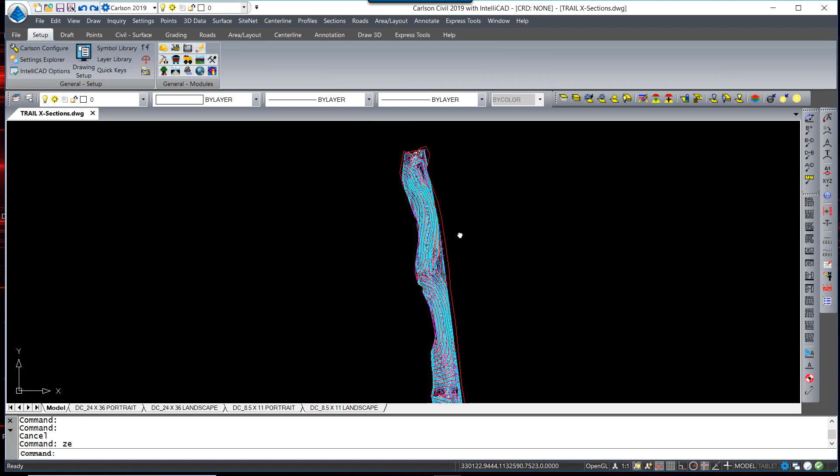First thing that I want to do is analyze this data and see what it is I have before I just blindly move into creating surfaces. But what I ultimately am going to do is create an existing surface followed by an as-built surface, cut cross sections, and calculate quantities. So let's take a look at this data.

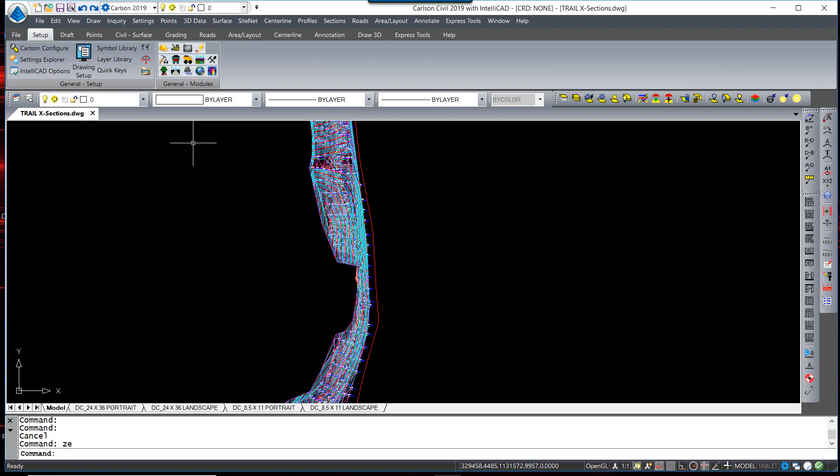One of the greatest tools that I like to use is the Drawing Inspector. I turn on Drawing Inspector, which is basically a toggle. It turns on and off. So immediately it doesn't appear that anything's happening, but it is. If you just right click, you'll see a menu of all the things you can display as you hover over an entity. So I'm going to turn on the layer name and the elevation, not the rest of this information.

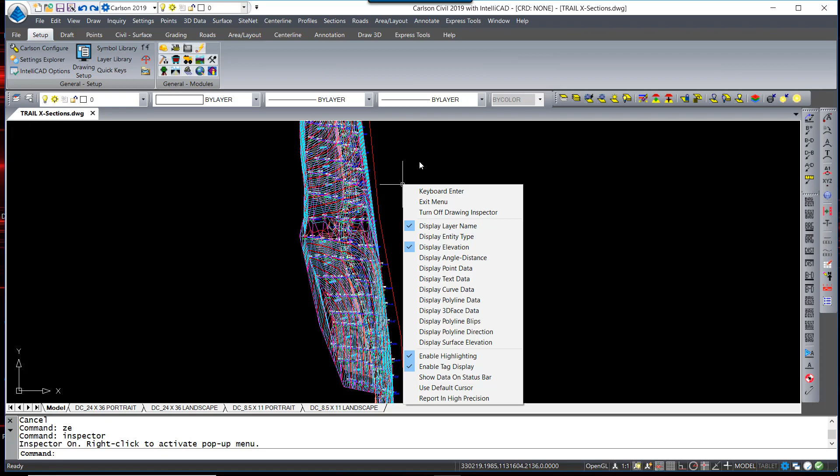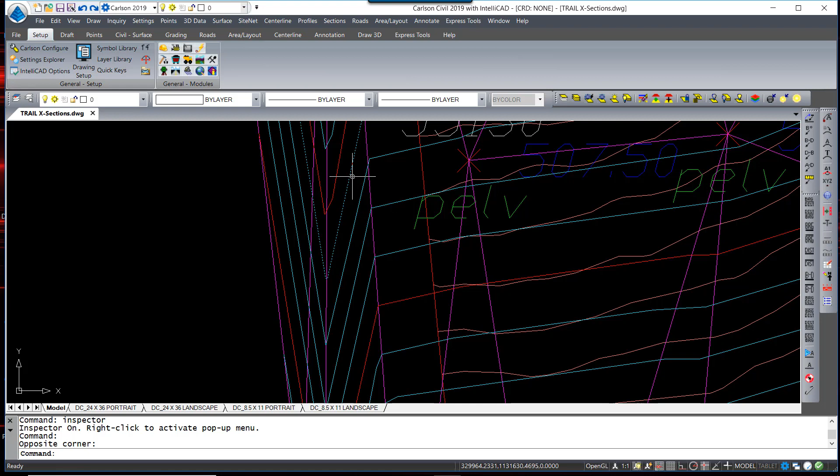So that's fine. And then I can hover over data such as these contour lines, and it displays the elevation of the contour line and the layer that it's on. I see we have E-contour, intermediate, and index. So those are the existing contour lines. Inside of that, I see a TIN line, and these triangulation lines are also elevated.

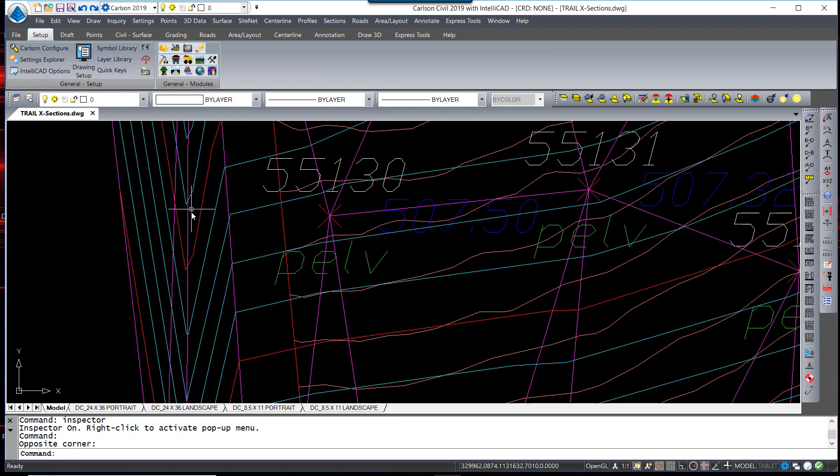Point data, which is not elevated, however, it does have a tagged elevation, so Carlson would use that as well. I have some other perimeter lines that are at 0 elevation. So knowing how Carlson works, that it's going to ignore things at a 0 elevation and take whatever is elevated and include that in the surface model, I know that I can use these entities as they are. I also see other contour lines in here on an as-built layer that are also elevated.

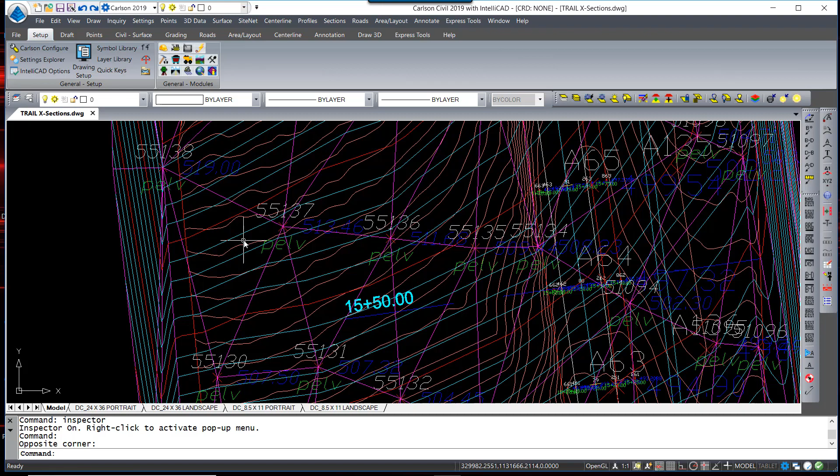These were actually created from a drone survey, whereas the existing contours were created from point data, an actual field survey. So I'm going to approach those two surfaces slightly different. Ultimately, it uses the same programming, but I'm going to evaluate them in a different manner. I see other point data in here. We have a center line of a road that is going to serve as the baseline for our cross sections.

I believe these are right and left edges of the roadway that are elevated. I can tell by looking at the elevations. The left side looks reasonable compared to the as-built contour. However, the right-hand side is considerably off, 400 or 500 feet, it looks to me like. So I may have an issue that has to be resolved.

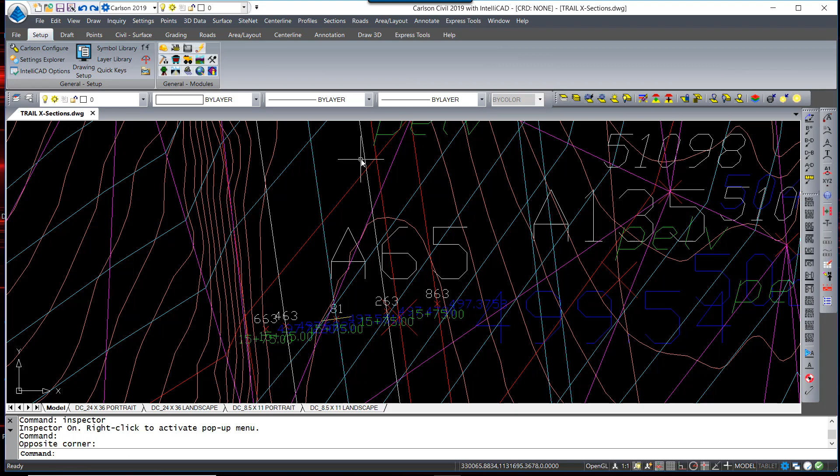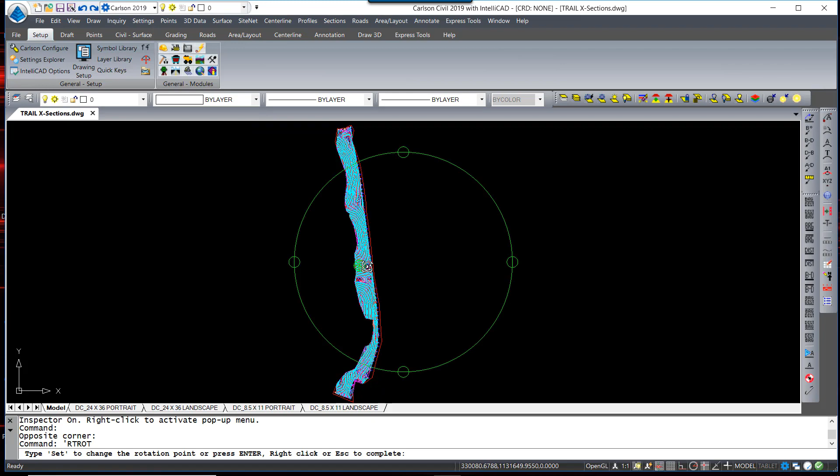Another way to take a good look at this data, and it's another thing I like to do in the very beginning, is I like to twist this up in 3D so I can actually see the data. One of the tools that I like for that is Orbit or Real-Time Rotate, which work very similar to each other, but you can just click and rotate in 3D the data. By doing that, I can immediately see some issues.

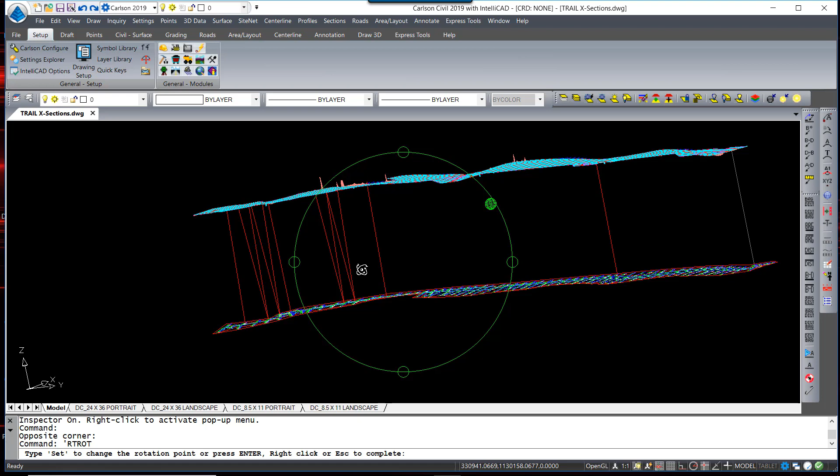That, in fact, is the right-hand side of the trail that I was talking about, and it is elevated inappropriately. They also have these spikes, these red lines coming up and down that are going in and out of the data. Those will cause problems with the surface model. And then I can see some spikes here. I hover over one of these, it is the as-built contour.

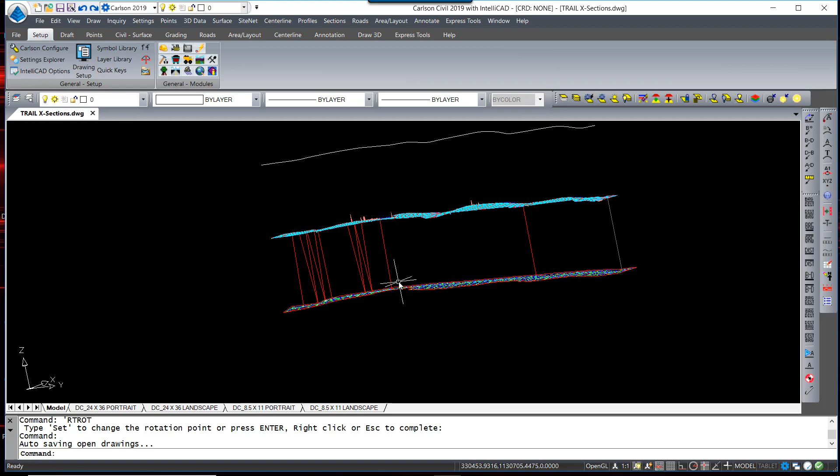So I had mentioned those are drone contours, so those are likely trees that were not stripped out of the drone data. So we have contours running up the height of a tree. So that will have to be dealt with. You can actually edit these in this view, which I'm going to do some of that, but I'm going to start by isolating some of these layers and see which ones have the issues, which ones I can use, and minimize the amount of editing that I have to do before I can get started.

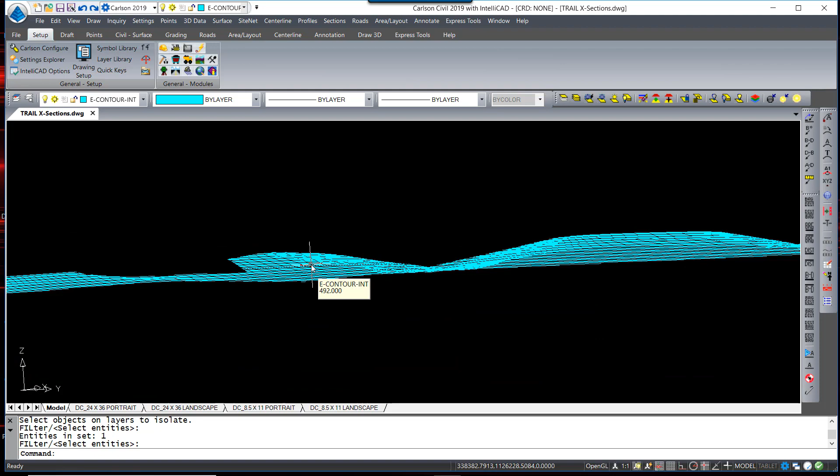So I'm going to use my isolate layer routine, and I'm going to pick one of these contour lines. So this is an existing contour. In my layer manager, what might be a little bit easier to do, I'm going to turn on the index. So I can see that my existing contours look very reasonable. I also want to take a look at those TIN lines. I believe those were on a layer called triangulation lines.

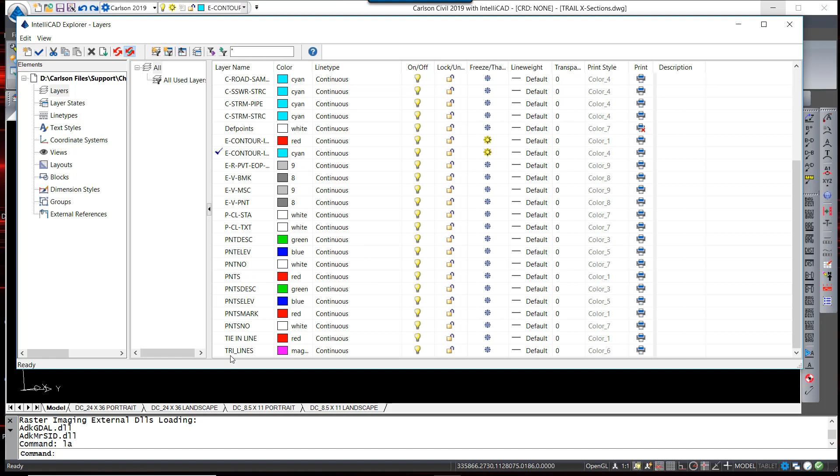And I'm going to turn those on. Those follow right along the contour lines. So those to me look like they are pretty reasonable. Turning all my layers back on.

These lines are called tie-in lines. I'm not sure what the purpose of those are for, but I know that they will introduce bad data into my surface model. So I can either just simply not use them, or I could correct them. I'm going to go ahead and clean some of that up.

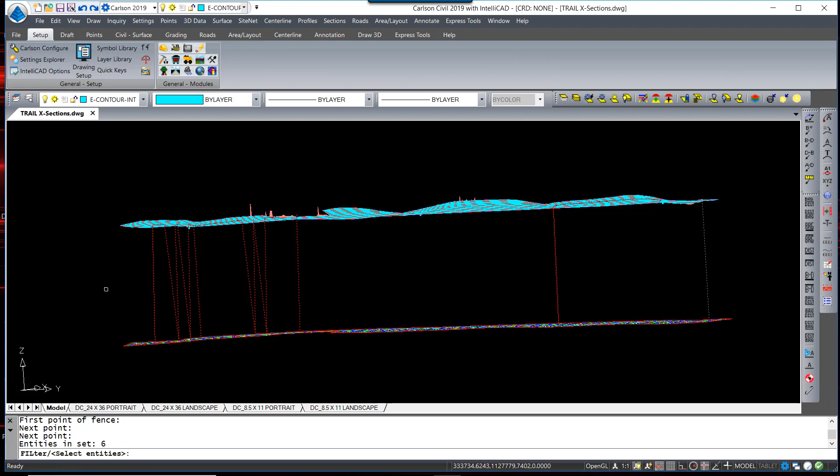I will use a command under Edit called 3D Entity to 2D. Command line prompts what elevation I want it to be. It's 0. And I'm just going to use a fence for selection and draw a line through here. It selects all those spikes, and when I hit Enter, they are all changed to 0. So that eliminates a lot of the data out of there.

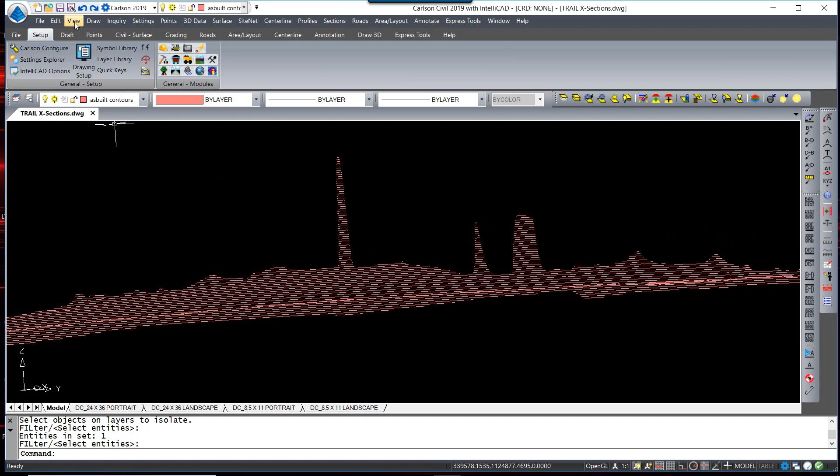I am now also going to try to clean up these contour lines on the as-built contour layer. So I'm going to isolate that layer and take a look at those spikes. So using my 3D orbit and rotating carefully, I can actually select some of this data and eliminate those contour lines, because I'm going to be building the surface model out of the contour lines themselves for the as-built contours. I have no other data in which to do that.

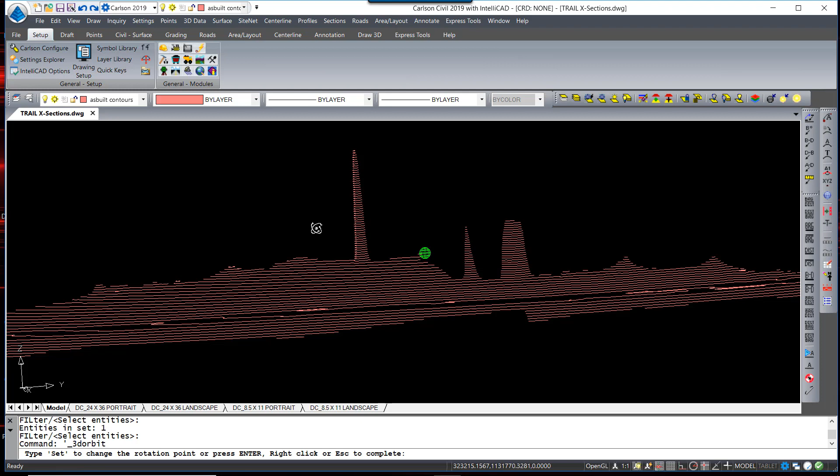So I'm going to at least try to eliminate the majority of these spikes to improve the quality of my surface model. So I'm simply just going to erase, and using a window polyline for selection, I can window these in. And I'm going to turn off my drawing inspector during this process. I'm going to spend a couple minutes here.

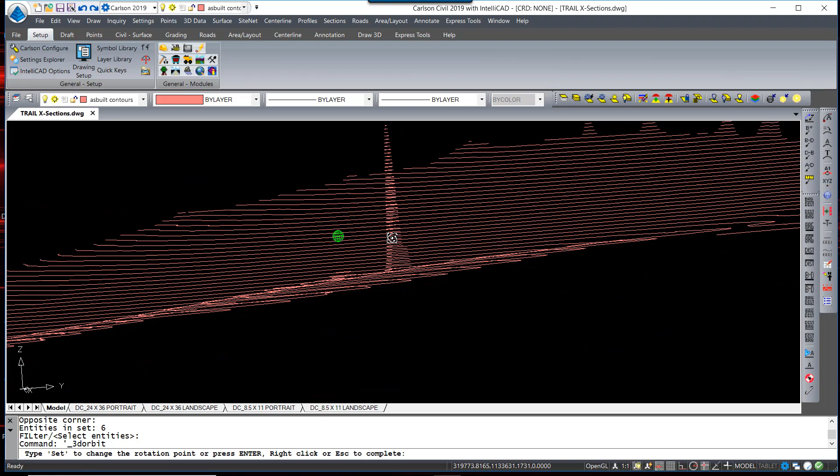In some cases like this, you have to be very careful about selecting. If I was to select too much here, I'd be erasing good contour lines. So I've got to be very careful about flipping up my perspective to make sure I'm not over-selecting or under-selecting data. Once I've completed editing these contours and eliminating data as best as I can, thaw all my layers again.

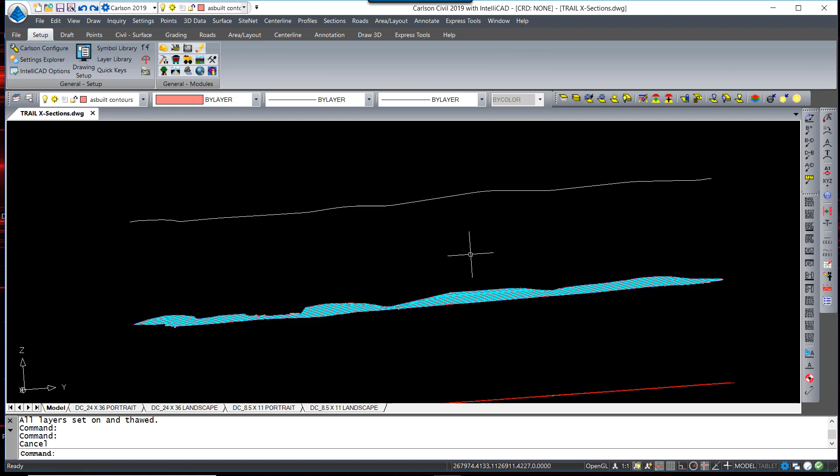The other thing I can do is either change or move this line. I'm not real sure of the datum change that created this particular line to be out of line with the rest of it, so it's off maybe 500 feet. So I'm just going to simply not use that line. So when I completed my editing process, I am going to go back to under the 3D view, hit Plan View, and it returns you back to this perspective.

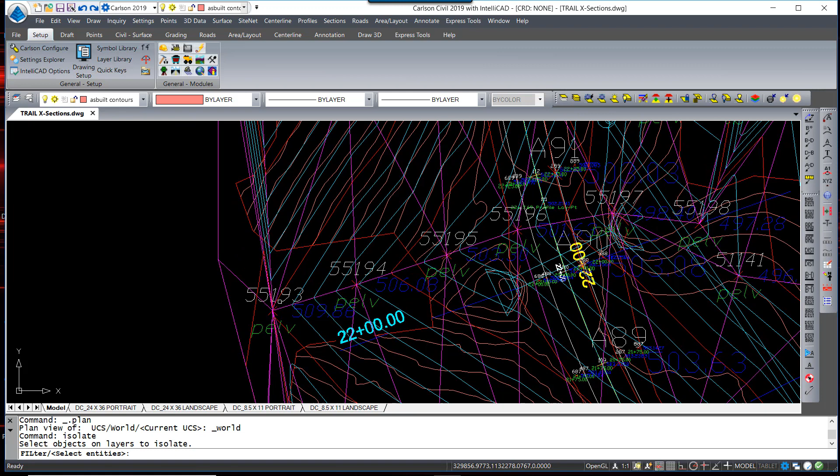So I'm going to start with the existing surface model to build that. I've already determined actually that the TIN lines and the contour lines are pretty much coincidental with each other, so those look to be pretty good data. So I'm going to simply build the surface model out of the TIN lines. So I isolate that layer. And there are my TIN lines.

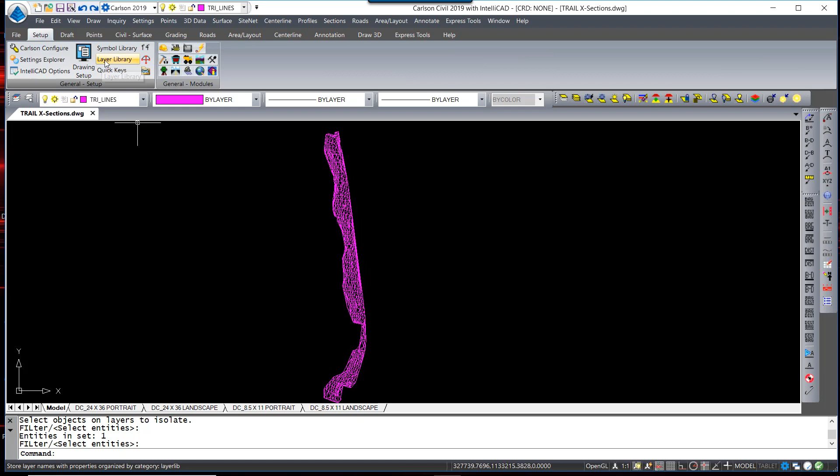So now I go into the surface model, and I'm just going to triangulate and contour. I have Write TIN File on. I'm going to hit Select, and it will create a new one. These are the existing, so I'm just going to call it Existing. Under the Contour tab, I don't really want it to draw contours, so I'm going to turn that off. I certainly don't want contours labeled. I'm just going to check my selection set.

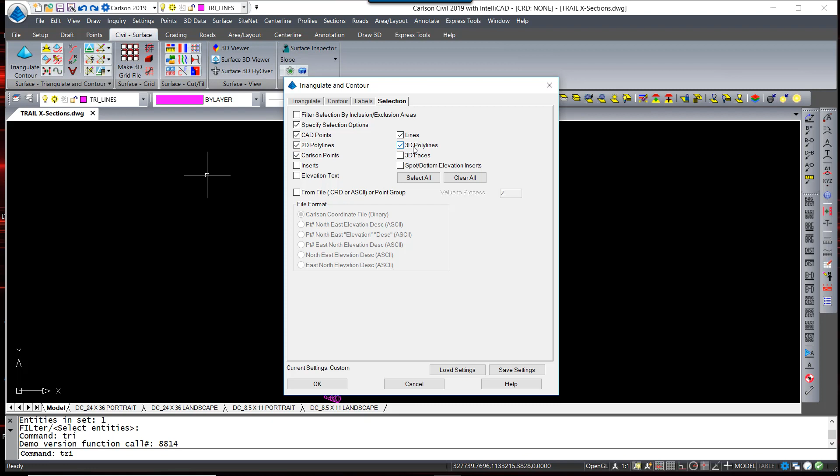They're all grayed out right now, and if I click this box for selecting the options, I can determine and verify that I have 2D polylines, which are contour lines, and 3D polylines, which are those TIN lines. So all my selections are in there. Ignore zero elevations, as you can see, is the default. Inclusion-exclusion areas is there so you can create a boundary if you want as an inclusion area, and then you could have separate polylines as exclusion areas. I am not really going to worry about that.

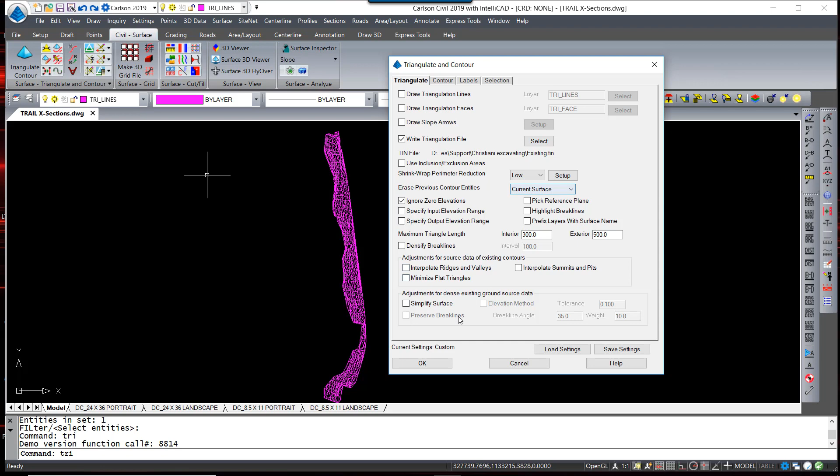I'm going to instead allow it to shrink wrap the perimeter, which essentially makes a boundary line invisible to you. By selecting it, it creates a shrink wrap entity, which is another Carlson command that draws a polyline around the outside of the entities. It's going to use that as the boundary with 3 options, low, medium, or high, which dictate how tight it follows that boundary. So I'm going to leave that on low, and all I have to do is hit OK now, and I will window in those TIN lines. So it quickly made the existing surface.

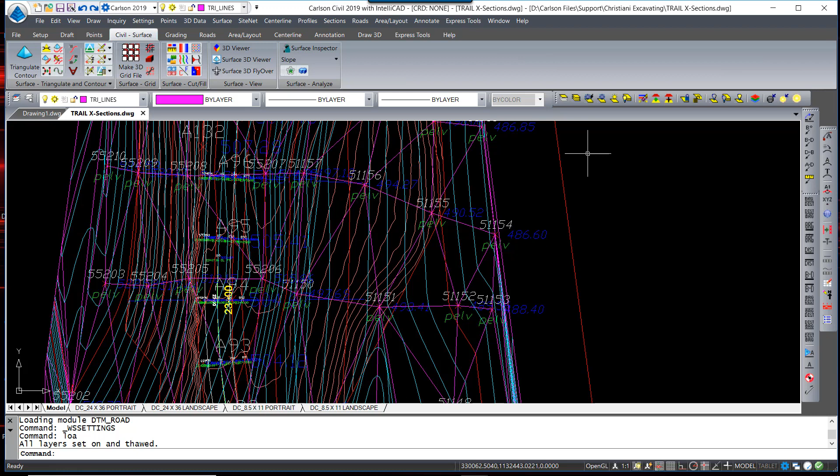Thaw these layers again. Now for the as-built surface model, the only data I really have is these contours developed by the drone survey, which I've done my best to edit. So I'm going to isolate that layer.

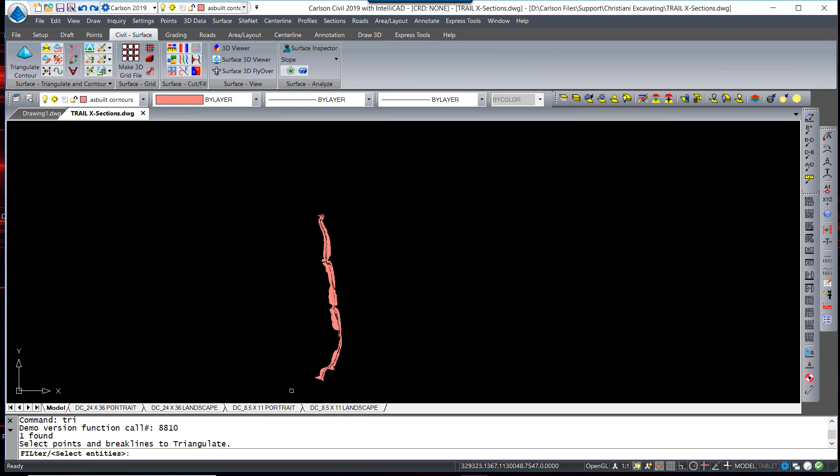Essentially do the same thing. Just going to create a surface model. Triangulate and contour. Create another TIN. This one I'm going to call as built. All the rest of the settings are the same. Just window this in and enter. In this case, I found some errors in here.

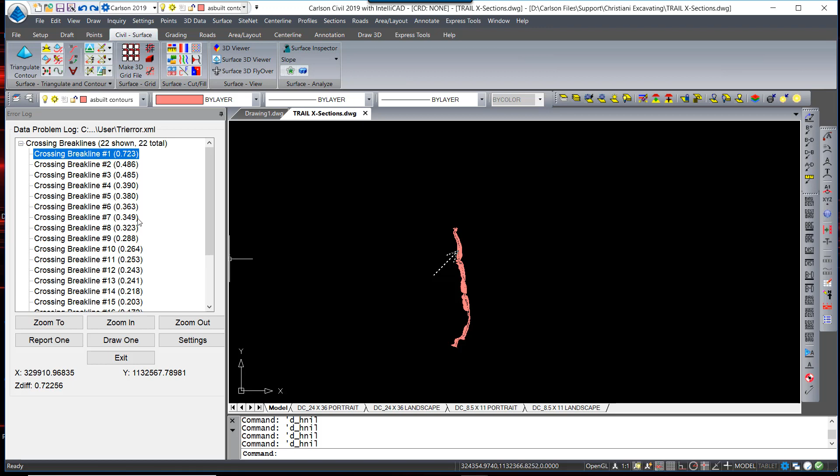Crossing break lines. This shows the elevation error of each crossing break line. Those are large enough there that I am going to concern myself with them. Some of these smaller ones aren't a big deal, but that's 3/4 of a foot. So I'm going to highlight one and just hit zoom in a few times until I find it. And right there I see that there is a line that is crossing over the contours.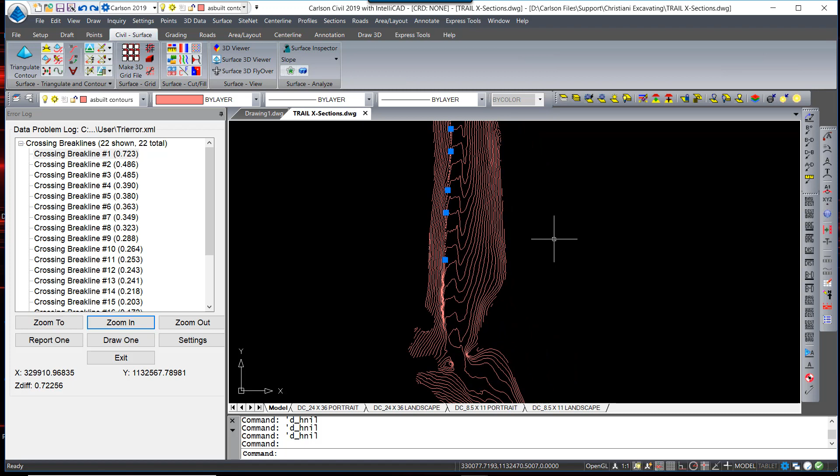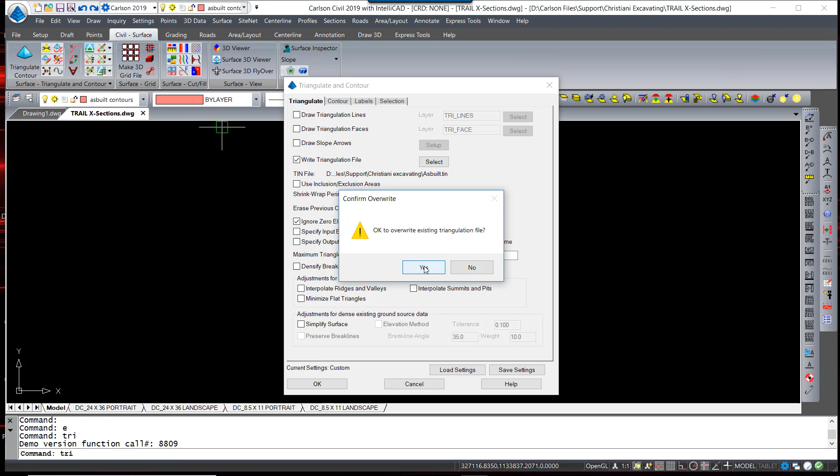So I'm just going to erase that and quickly look and see if there's any more of those. They highlight. I see one on the other side here, so I'm going to zoom into that. Same situation. There are some lines there, so I'm going to erase that and exit. And we'll just try that again. Say yes to overwrite that, and that time no error. Turn all my layers back on.

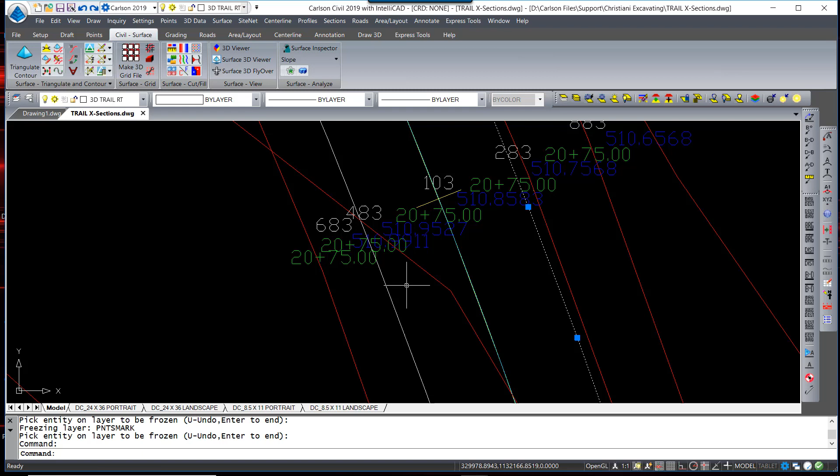Now I want to establish this alignment. But to make my life easier, I'm going to freeze some of these layers now that I don't need. I don't really need to look at the contours or the point data. I find other point data in here that appears to be a calculated layout. So I'm going to get rid of that, remembering that this layer, or this side of the roadway, had errors. I'm going to freeze that as well. So I've got my layers set up.

I'm going to define the center line, the baseline of this project. I have a polyline that's drawn in here. It looks like it's continuous from beginning to end. I'm going to check, though, the stationing on it is labeled here at every 50 feet plus some odd intervals. So I just want to check and make sure that this is the beginning station of 0+00.

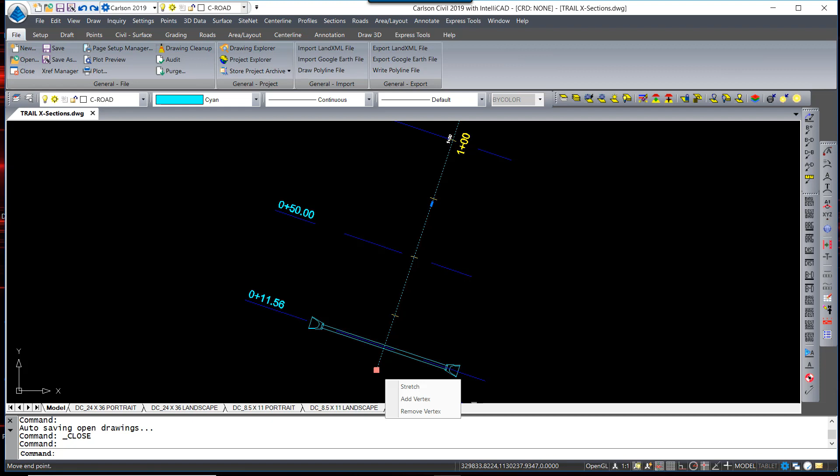So I'm just going to inverse from the intersection at 1+00 to the beginning. And I see it's not exactly 100 feet, 98.366. So that means the beginning of this is actually 1.633, and not 0. So I need to keep that in mind when I create my center line, which is the next step here. So I'm going to go under Create Polyline to Centerline File.

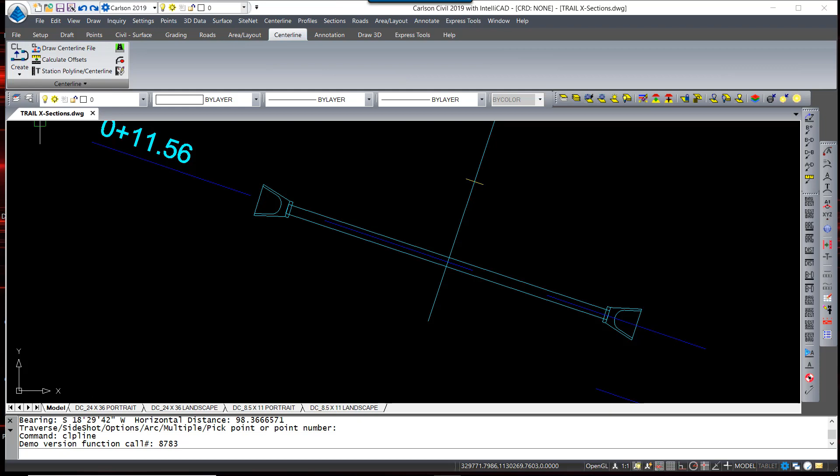So it's going to take that polyline that's already drawn and write it out to a .cl file. I will name that CL Road. Select that polyline. You see briefly that there's arrows showing the direction of the polyline. The stations are ascending based upon the way it was drawn. If it was incorrect, you have an option to reverse it at this point.

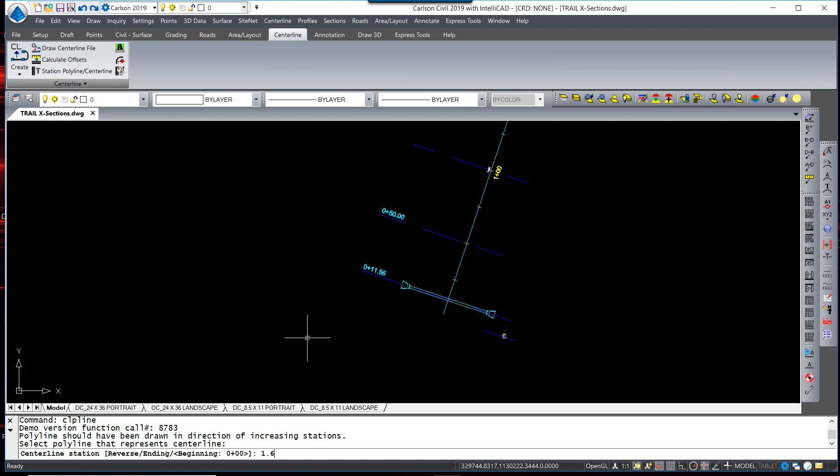It defaults to the beginning of 0+00, which we realize is not quite correct. So we're going to put in station 1.633, and that defines our station. Verify that by using this command, calculate offsets. Make sure that I'm defining the centerline by the centerline file. I hit OK. Grab that centerline file. You see a little display of that.

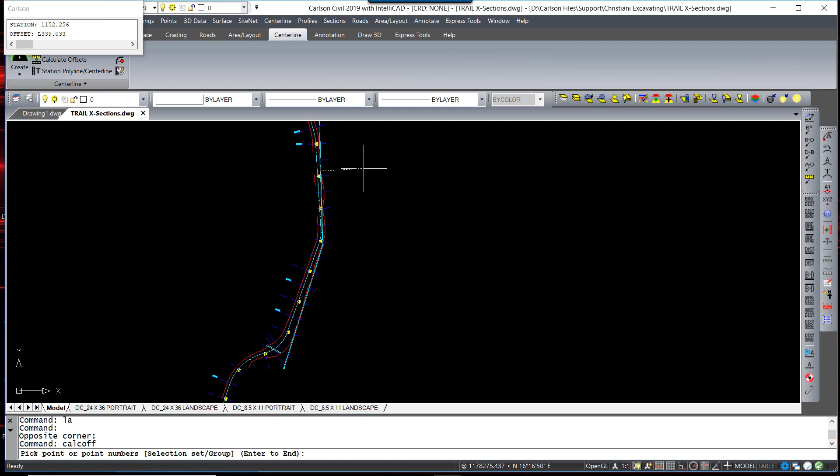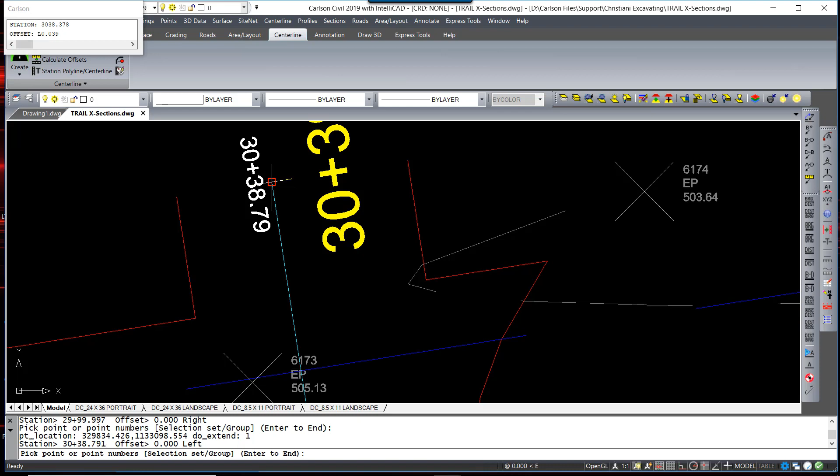And I hit open, and as I move my cursor around, you can see in the dialog box above that the station is changing as I move through. So I'm just going to go up here to the end and pick an even station here at 30+00, and we're within 0.003 of a foot, so that's going to be good enough. I'll double check the end station, 30+38.79, so that's good. Let's get out of that command.

But when you issue this command, it does create a report of any points that you ID'd, and you can print those out if you wanted to. Now what I'm going to do is define a cross-section layout. I'm going to go into my sections menu. And this is somewhat of a two-step process. First thing we're going to do is input edit a section alignment.

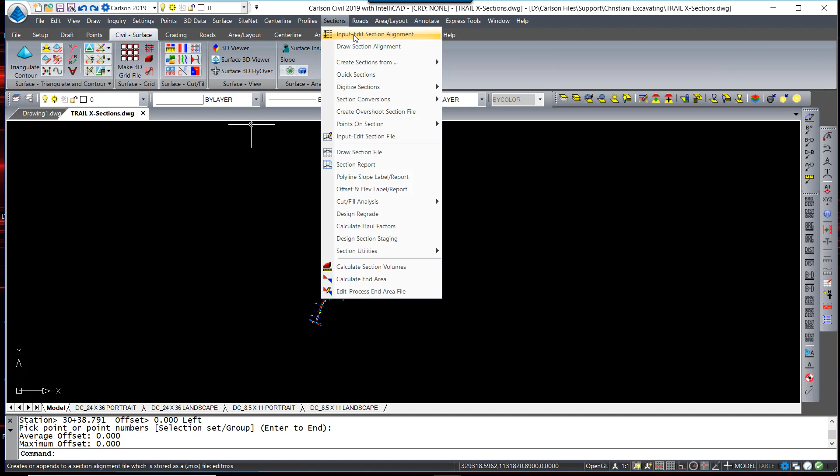What that does is define the alignment of the sections that we're going to take. The section alignment is basically giving it the horizontal alignment, the width of the cross-section sampling, and the frequency of the samples.

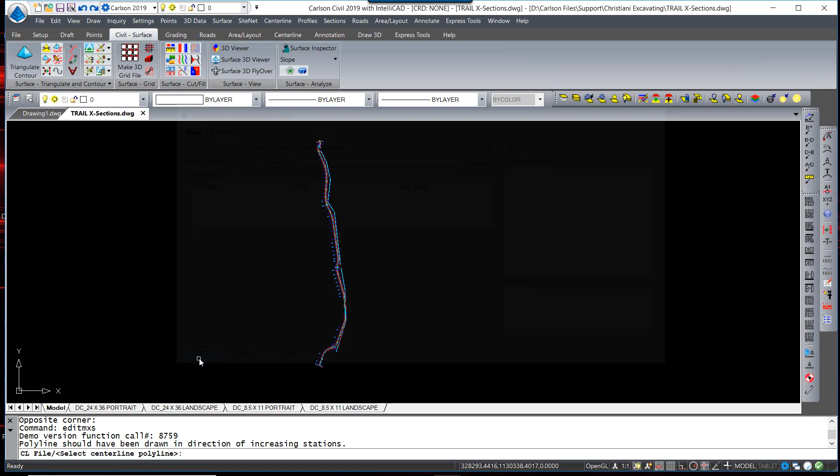I'm going to go into Sections and Input Section Alignment, and this creates an MXS file which contains the alignment parameters. It's asking me to identify the center line. We already have the center line file created, so I'm going to hit F for File and select the center line file again. Then we enter in the station interval.

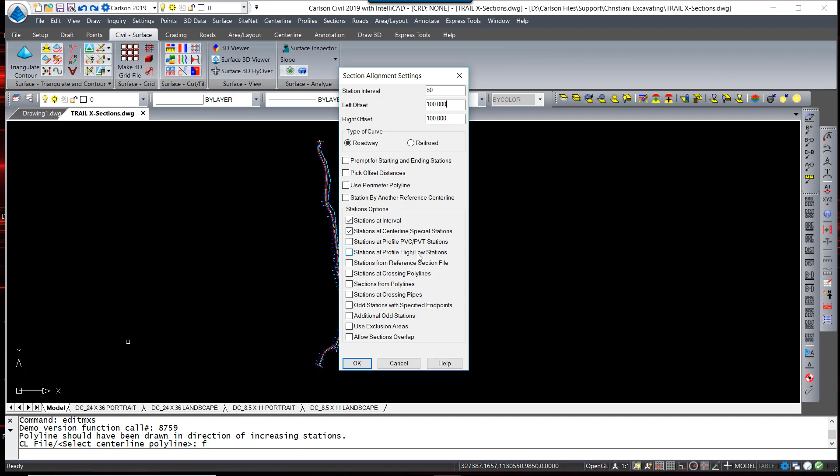We want them every 50 feet, and the left and right offsets. So I'm going to leave them at 100, even though it's more than what I need. If it exceeds the surface model's parameters, then it will just stop. Then you have other options in here about prompting and adding additional stations, special stations like on profiles, PVC, PVT, etc. I'm not going to concern myself with those, so I'm just going to hit OK, and that sets up

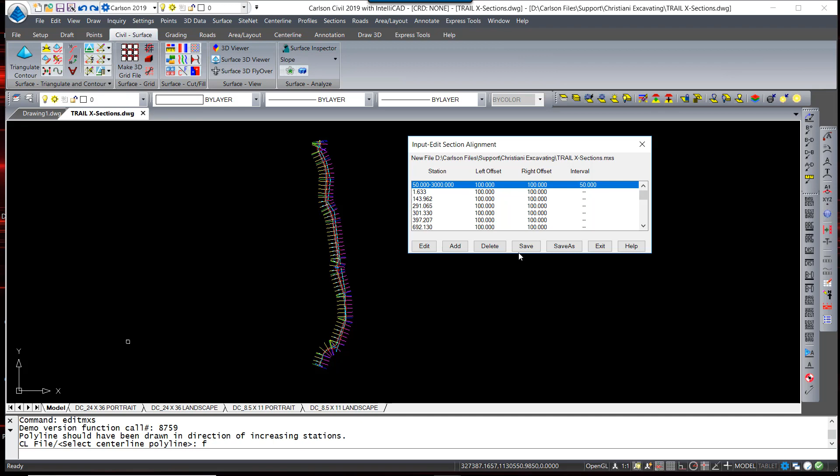the alignment. You can see temporarily on the screen colored lines drawn along that sample line. So those are where the cross sections will be sampled. You also have a dialog box that shows up that allows you to edit this MXS file, this alignment file, as you see fit. So we hit save and exit, and that portion is done.

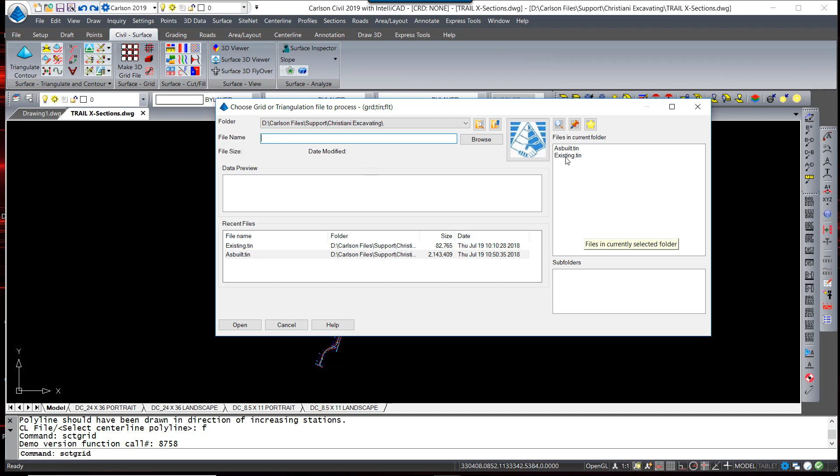The next step is to actually sample from that MXS file. So we're going to create the cross sections from a grid or TIN surface. So this is first selecting the TIN surface that we're going to sample from, and we're going to start with the existing TIN. Link sections to the triangulation.

That linking means that if we were to update the TIN file for whatever reason, the cross sections would update with it as well. I'm going to set that to prompt. I don't anticipate that we'll be doing that, but just in case. So I'll hit OK. And then it's asking me to select the MXS file to process, which is the one we had just created. The next prompt is asking us to create a section file. I'm going to name it Centerline Road.

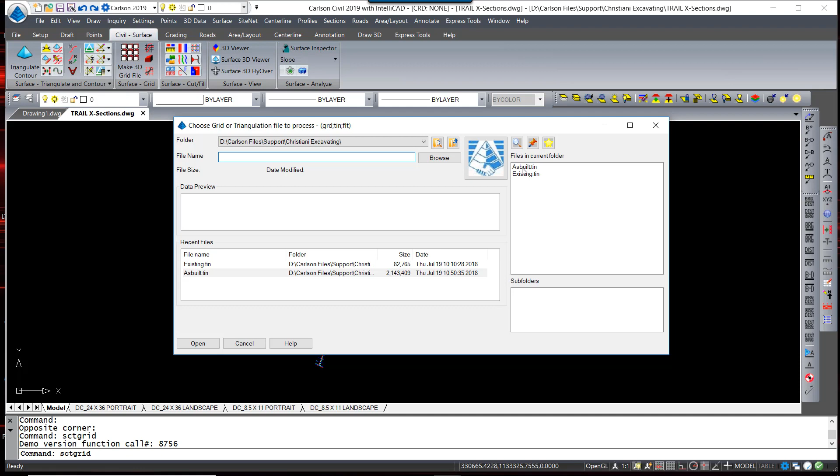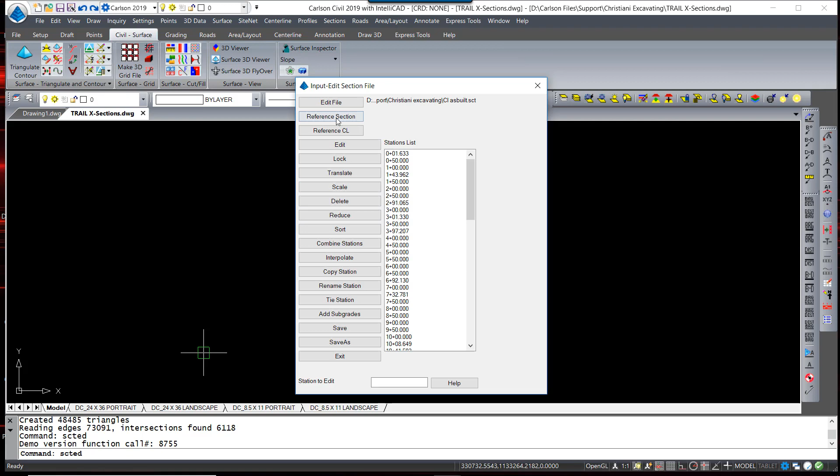I'm going to repeat that process, creating sections from a TIN file. This time I'm going to pick the as-built TIN, but using the same MXS file and writing out CL as-built. Now, if we want to look at those files, we can now go into Input Edit Section File. So I'm going to start by looking at the as-built, open that up, and then you see an option for a reference section. I'm going to put in the original CL Road file.

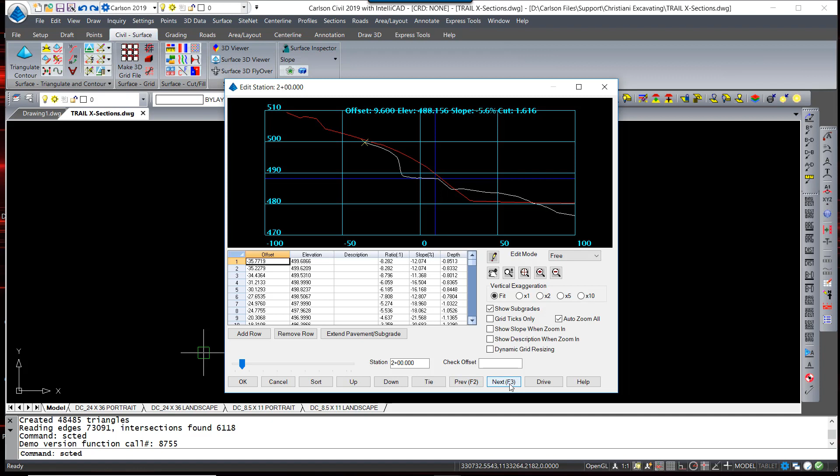I can look on these now and I can compare the cross sections, and by using the next button I can just go through one at a time and compare the cross sections between the as-built and the original files. Now you can, if you want to, actually edit these. You can see that there's points not tying in exactly correct. They're at the exact same position, keeping in mind that we have a vertical exaggeration of fit.

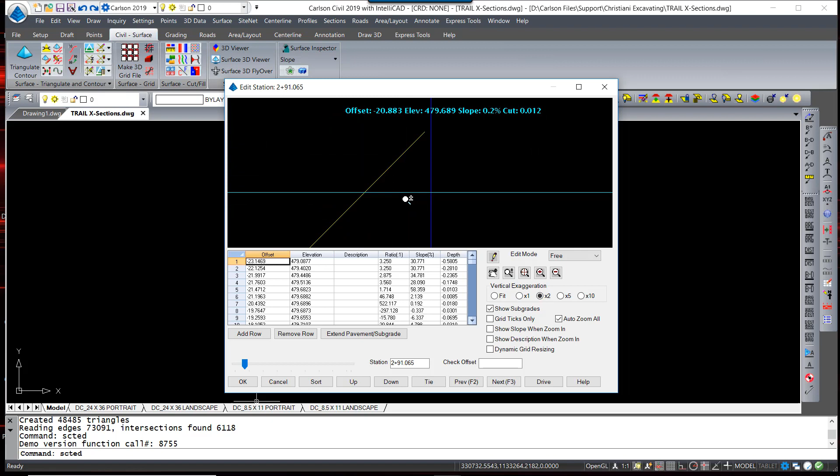If we lowered that to say just a ×2 or something, we'll see those a little tighter than what it appeared before. I like them on fit just so I can see the whole thing. So I'm going to close out that and exit that for now. Now that we've created and reviewed the cross sections, we're ready to print them.

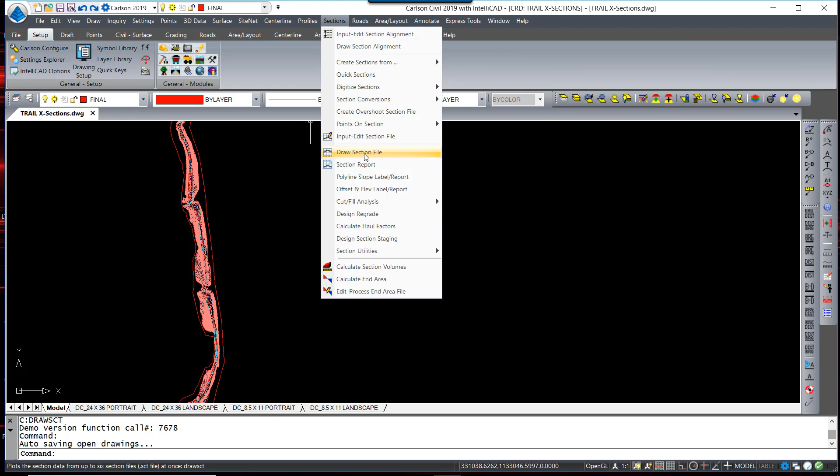So we'll go back into Sections and execute Draw Section File. This dialog box pops up and we can add cross sections. So I'm going to add the existing cross section first and add the as-built cross sections second. The order of these will become apparent in the next step. And then I hit OK.

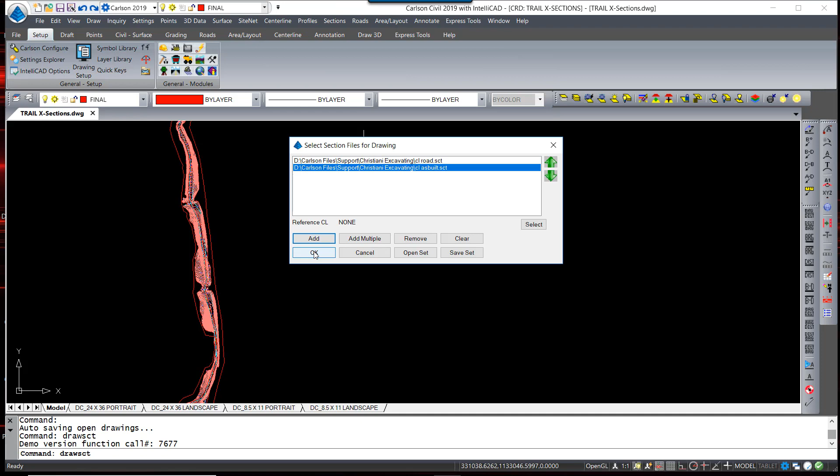So here's the dialog box for setting up drawing the cross sections. So the first thing I'm going to do is pay attention to the horizontal and vertical scale. So these are set to 40 and 4, which I'm going to leave. It's a 10 times vertical exaggeration.

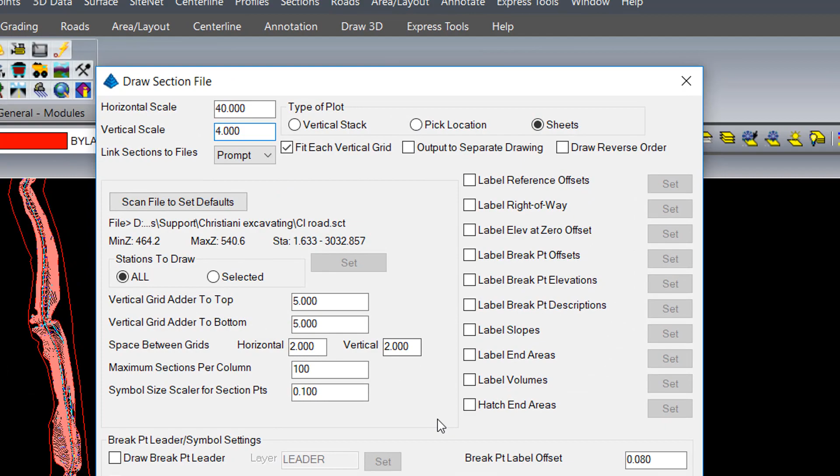I am going to pick sheet plot, which means it's going to attempt to place cross sections based upon the sheet size. I'm still going to do that right here in model space in my drawing, as opposed to a vertical stack where they would all be on top of each other or manually picking each location.

Now, to set the defaults, to find the minimum and maximum heights and widths of the cross sections, we execute the Scan File to Set Defaults button. It asks if we want to set sheet numbers of rows and columns, and I'm going to say yes. So it scans the file and puts in a minimum and maximum elevation, the station range, and sets up the defaults for the sheets as we're going to plot them.

I'm going to draw all the stations. If you only wanted to draw some, you would simply put that on selected. I'm going to leave these defaults alone - these have to do with how each cross-section is going to lay out on the sheet.

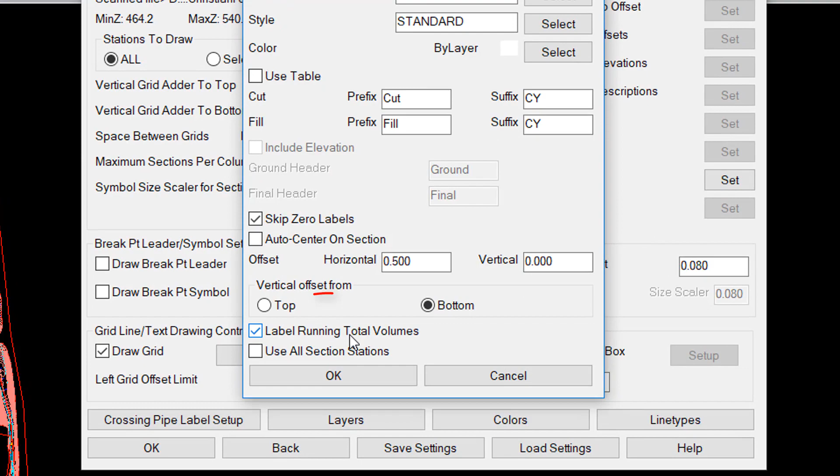Now there are several options of what to label as you're drawing the cross-sections. The ones of note are label volumes and label end areas. If I turn those on, it will do an average end area calculation from the cross-sections, which, if you have good cross-section data and are required to produce a report like that, would work out well. It will place an accumulative volume on each cross-section, and you have an option to label running total volumes as you go.

It's a more accurate option to calculate volumes using the two-surface method, which essentially compares one TIN surface to the other. We already have those TIN surfaces created, so I'm going to calculate volumes using that method instead.

So the next thing I'm going to do is take a look at the grid setup. This is to draw a grid for each cross section. You can set your layers and text sizes, but the main thing I want to check is my horizontal and vertical grid spacing. I have those set to put a grid every 50 feet horizontally and every 5 feet vertically. That should coincide with the vertical exaggeration that I'm using.

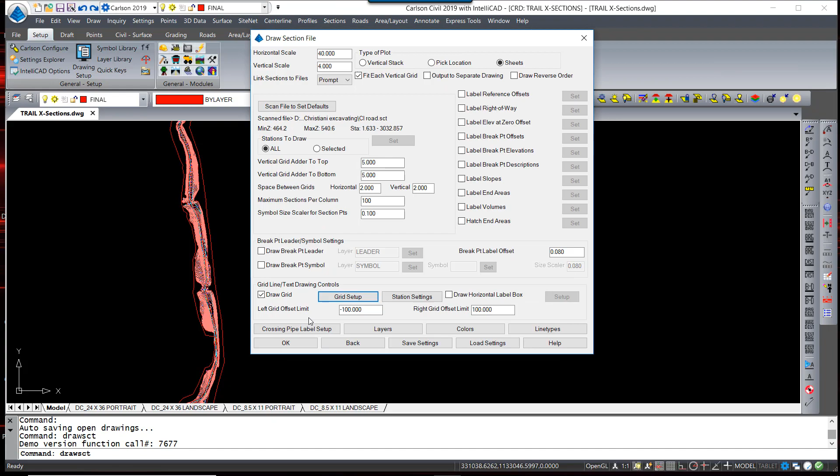The next thing I'm going to take a look at is the layers. The order of those section files that I brought in coincide here, so the layer that it's going to draw the existing on is called existing, and the as-built is going to be on one called final. We didn't define any subgrades, so that will not be plotted. So when I have all my settings ready to go, I hit OK.

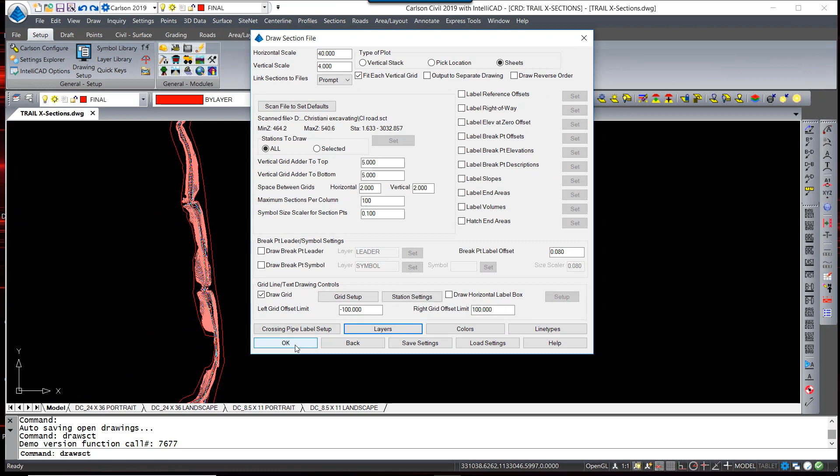So the sheet drafting parameter dialog box pops up. This would not happen if I were using another method, like vertical or picked. I'm going to go ahead and plot these in model space, so they're just going to be off to the side instead of, say, creating layout tabs.

This block name is a standard sheet that's set up. The expectation is that you will modify that sheet with your own title block and whatever other information you want on a standard cross-sections sheet, but this is just the default sheet block. This is the size of the paper, including the borders, sheet layer.

Then we have an option for rows and columns of the cross-sections. These values are in here from this cross-section scan that we had performed earlier. So this was going to plot them out with just one row and five columns. I'm going to force that to tighten up a little bit by putting two rows per sheet. Once these values are all set, we just hit OK.

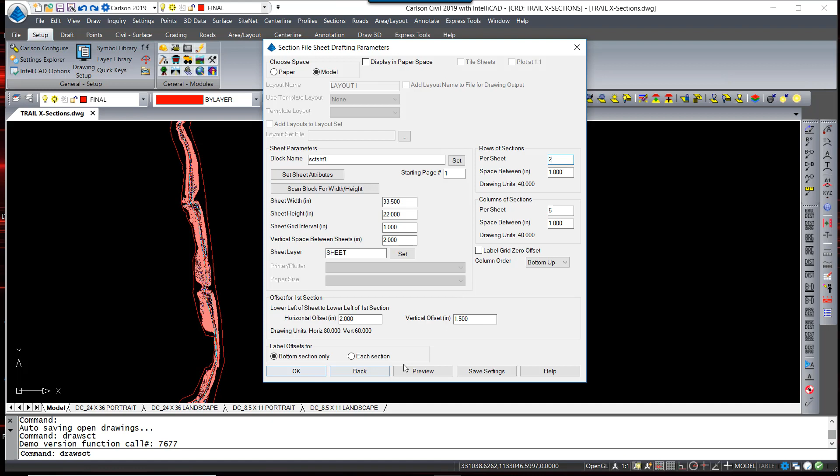Then it asks where you would like to begin plotting these, and I'm just going to pick a spot on the screen off to the side. So the program draws all the sheets with the cross sections at the scales provided.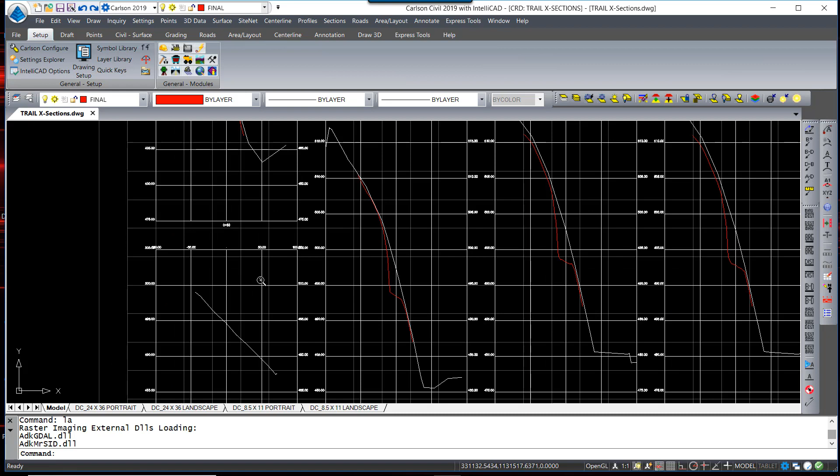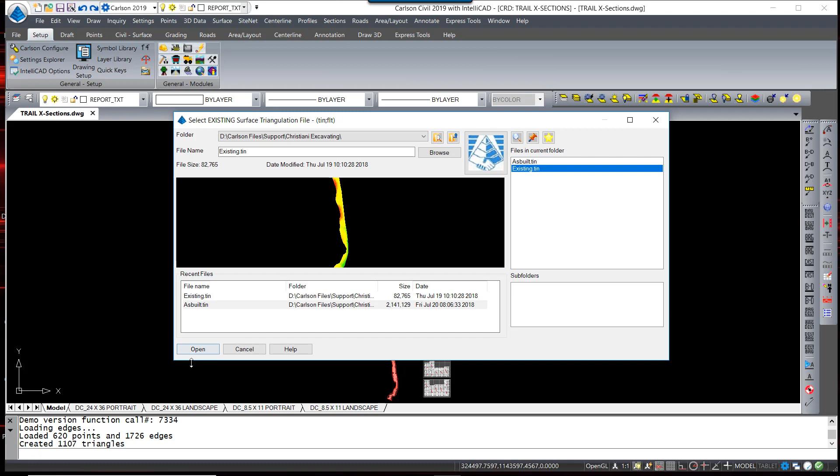So I had mentioned earlier calculating volumes by the surface model method. Under surface, you have volumes by triangulation. I'm going to use the two triangulation surface volumes. So it asks for the existing surface, which is called existing, and the final surface, which is the as-built.

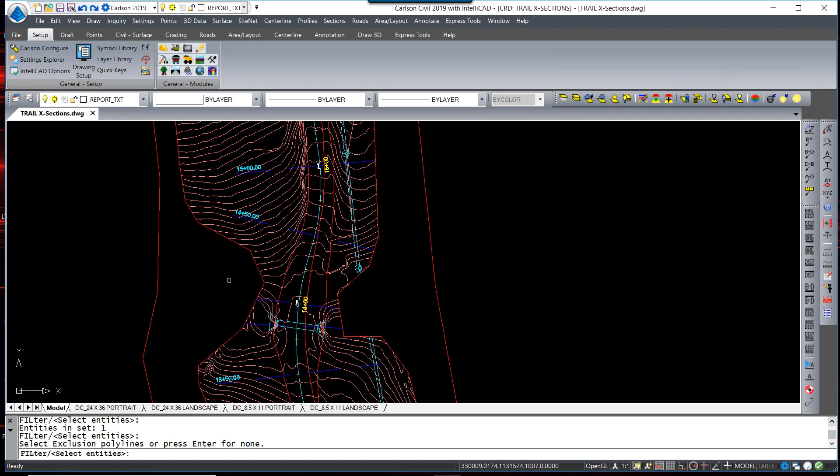It is now asking for an inclusion polyline. In this case, I am going to select the boundary line that had been drawn around the as-built contours. So I simply pick that polyline, hit enter. It's now asking for an exclusion polyline, which I do not have, so I just hit enter.

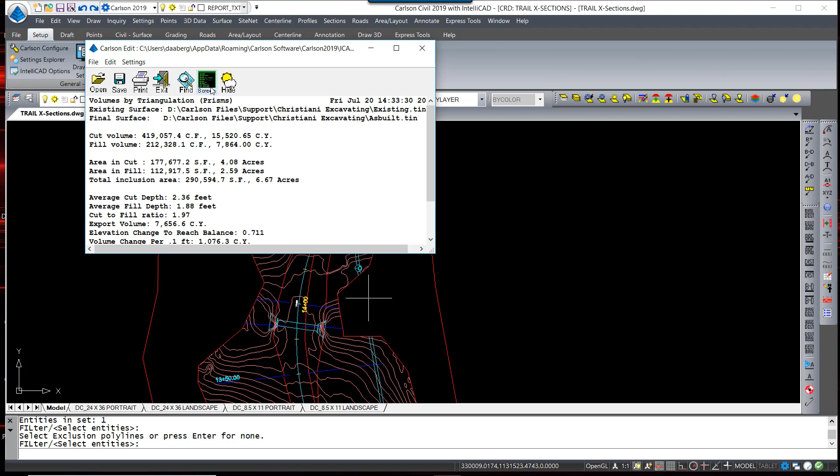There's an option for cut and fill shrink factors. I'm not going to take those - I am just going to hit OK. And there's a report with my volumes. I can plot this in the drawing file by hitting Screen, MText, and off to the side I have my report with volumes.